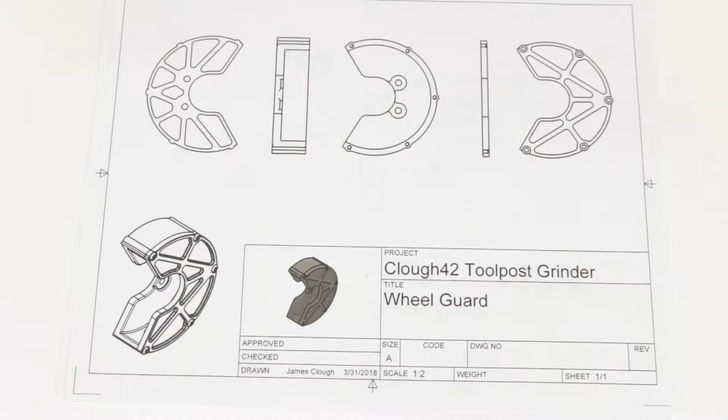I spent a lot of time trying to figure out exactly how I wanted to put together a guard for the Toolpost grinder, and this is what I came up with. You can see here in the isometric drawing, it's two parts. It's a hollow back piece that has a back plate and a wall that goes around the wheel, and then a front plate that screws on with 5 8-32 screws.

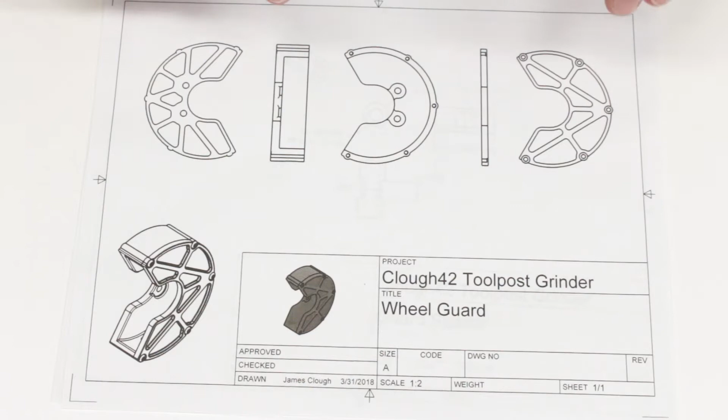Now, I spent some time trying to figure out exactly how to go about fabricating this. This is kind of the design that I had in mind, but this is tough to make. I could make a couple of plates on the milling machine and web them out nicely like this if I wanted to, or just leave them as flat plates, and then make a ring that screws in from both sides, or maybe is welded in. You could do this with a piece of tubing or a heavy ring roller, but it's a lot of work and it's kind of hard to hang on to. There's a lot of really awkward setups.

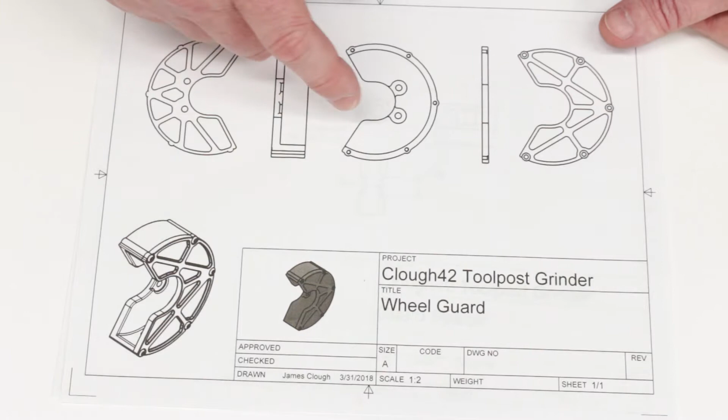And I don't have a welder, so if I wanted to mill this out of a solid piece of aluminum, we're talking about maybe a 6-inch round, 5.5-inch round, 1.5 inches thick, and almost all of that ends up being converted to chips. So that's going to take a long time, it's going to be expensive, and it's not going to be very efficient. Somebody in one of my videos suggested 3D printing the guard.

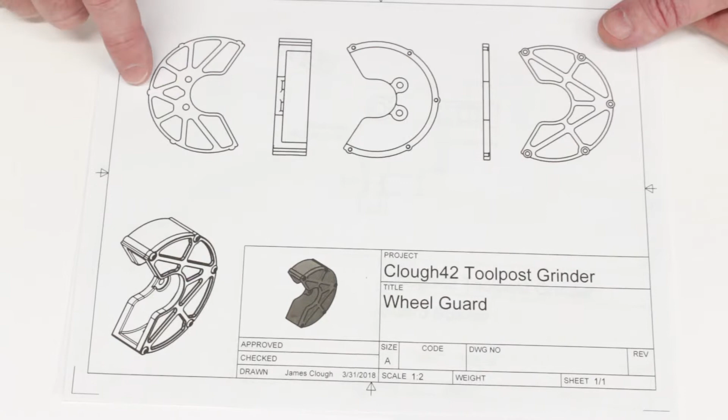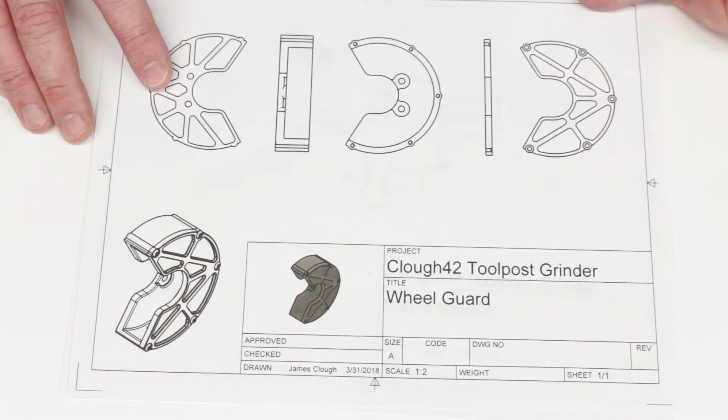Now that's something that I just dismissed up front because I was concerned about the strength. And the primary issue is the layer adhesion. Certainly PLA would be right out. That material is way too brittle. ABS or maybe PETG might be okay. They do have the tensile strength if they were injection molded to make something plausible, but the real issue is the layer bonding.

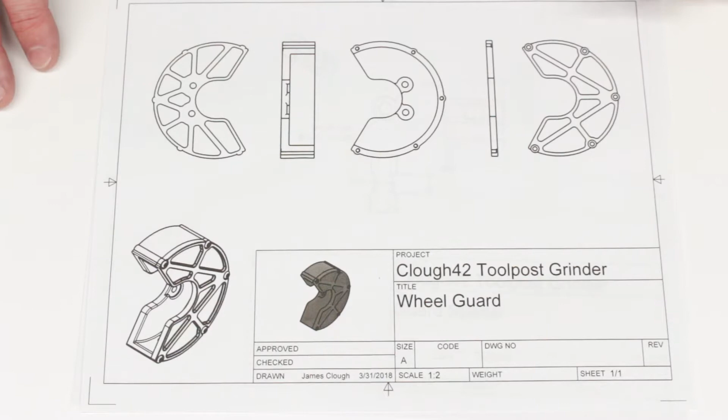So the layer adhesion between the layers: this would be printed flat, and so it would be built up in this direction, layer by layer, and the adhesion between those layers is always a weak point. So I was just too afraid that if I did have an accident and had a wheel burst, it would delaminate and the guard would fail and wouldn't do its job. But then I realized all 3D printers don't work that way. So I had these parts printed on an HP Jet Fusion 3D printer. Now the way the Jet Fusion, I don't own one, I know a guy.

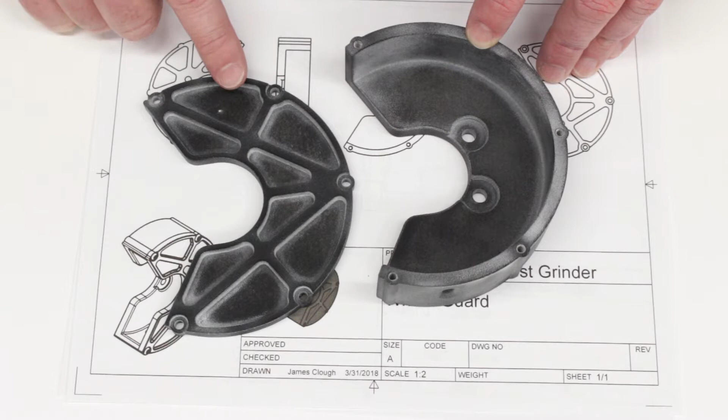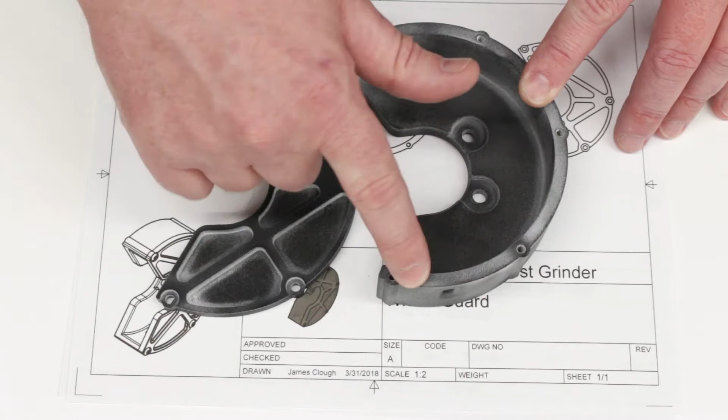The way the Jet Fusion printer works is it builds up layers of powder and it melts those together, somewhat like selective laser sintering, which melts with a laser. But the way this process works is I think they spray down using an inkjet head, comes across the powder and lays down an infrared absorbing material, and then they flash the whole thing with an infrared lamp, which melts the plastic powder together where the infrared absorbing material was placed.

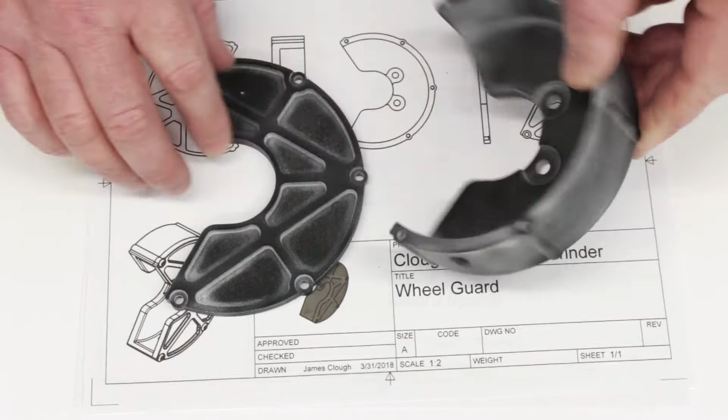So this is nylon, PA12, with a tensile strength around 7,000 PSI. And the great thing about this is that even though this is built up in layers, the strength in the Z direction is almost exactly the same as the strength in the X and Y direction. So you get that 7,000 PSI in every direction.

So just for comparison, a mild steel, like a cheap rolled sheet metal, like you would find in an import grinder guard, is probably going to be around 25 to 30,000 PSI, which is quite a bit higher than this, but the material is also very thin, about 1 millimeter thick.

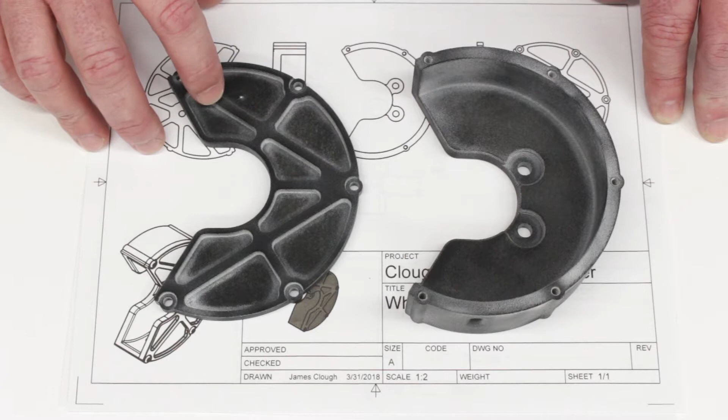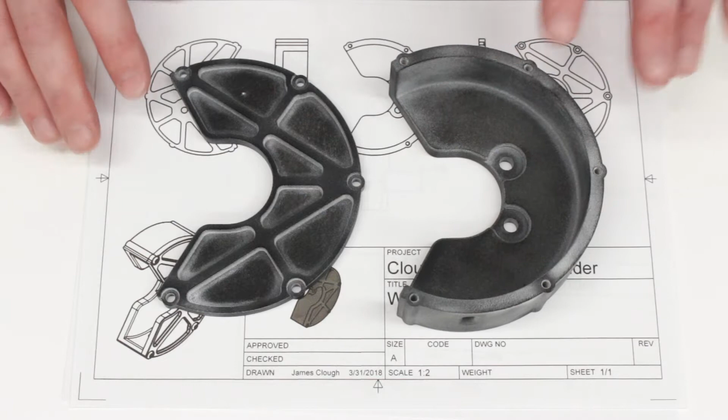And so what I chose to do here is I'm using, again, a 7,000 PSI material, but I made the wall much, much thicker. This is over 6 millimeters thick. It's about 1/4 of an inch. And that gives the added strength. This is solid all the way through. And again, you get that 7,000 PSI in every direction. So I'm satisfied with this.

Certainly if you make a guard for your own grinder, you're going to have to decide what materials you want to use and what you're okay with. But I'm going to proceed with this. I'm happy with this for my personal use.

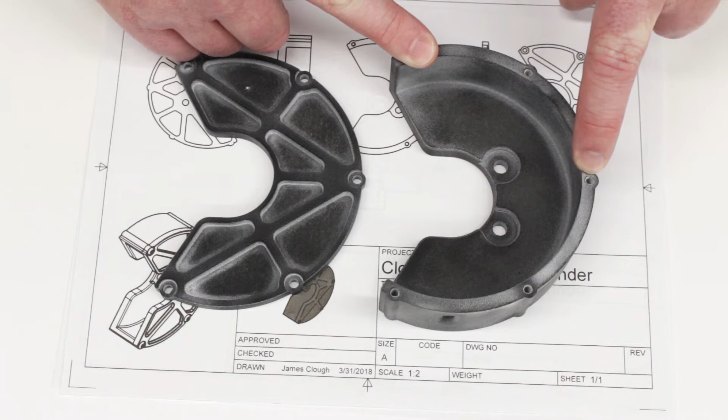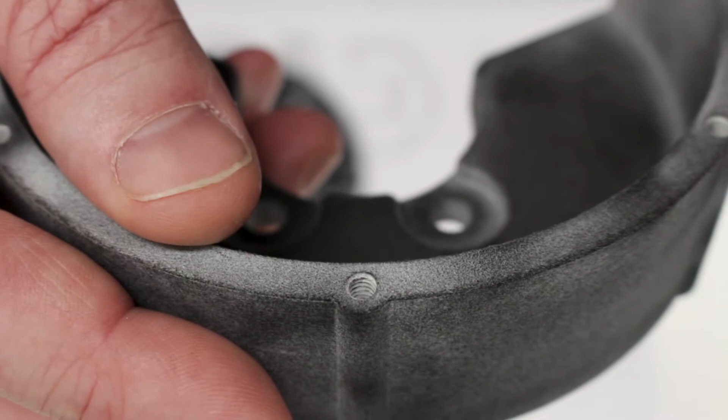Now, in order to put this together, we've got 5 8-32 screws. And I don't know if you can see this, but I actually modeled the 8-32 screw threads right into the holes. And the printer did a really good job. Let me see if I can get you a shot here. The printer did a really good job of printing those. You can see the threads in the holes.

Now, I have done nothing to this. I haven't run a tap through them. Those are just exactly as they came off the printer. They get de-dusted and sandblasted to remove the excess material. And I'm actually pretty impressed. I'm going to try running some 8-32 screws into there and just see how they work.

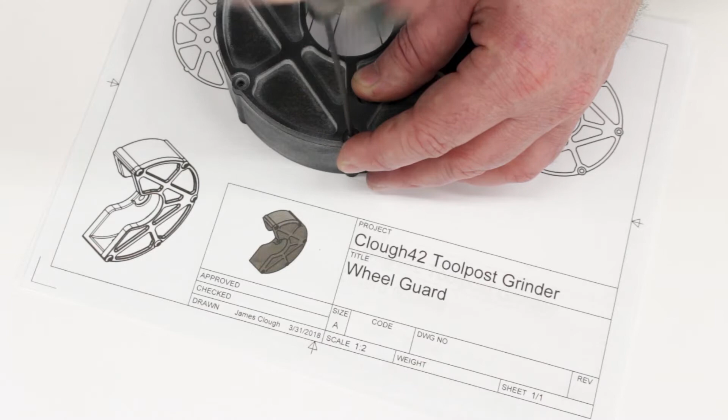Worst case scenario, I can run a tap through to clean them up. But I'm going to give it a shot without first, just to see how it goes. Oh, that goes really easily. And it bottoms nicely. Okay, I think that is going to work. I don't even have to clean those up.

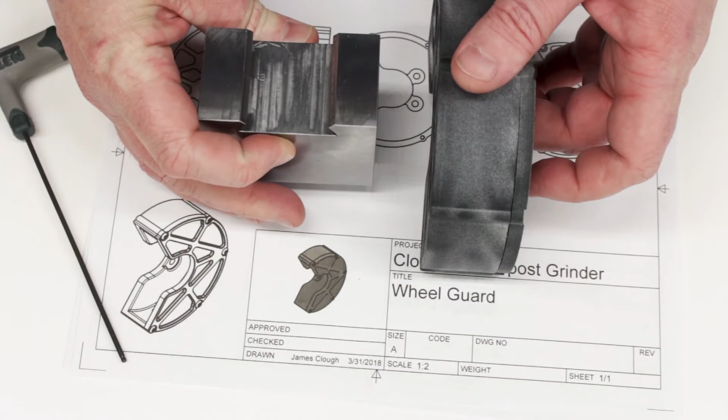Okay, so to connect this to the grinder, there are 2 holes here for 1/4-28 screws, and we'll make a couple of spacers so that that will space off of the tool post clamp. Spacers are just going to be made from a piece of 1/2-inch drill rod. I'm going to make 2 of them, put a couple of flats on it so it's easy to turn, and we'll just drill and thread it all the way through.

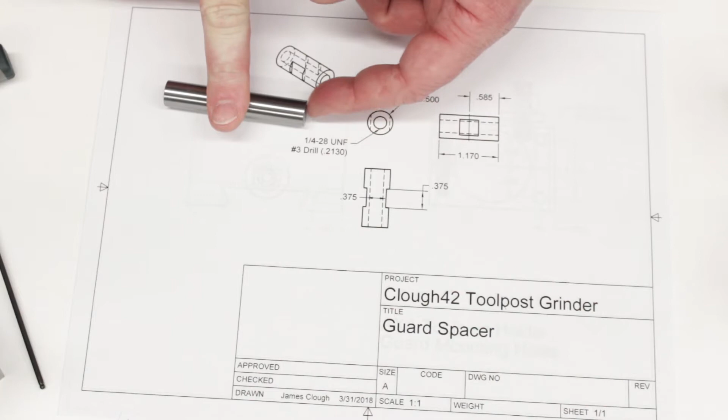So this is enough for 2, so I can use a piece of 1/4-28 screw to mount this in, and then a 1/4-28 screw to mount the guard onto the other end. And then we'll of course also have to take the tool post clamp here and drill and tap a couple of holes in it to actually accept those. So I think we've got everything that we need. I already faced the ends of this to get it square. Let's start by going over to the mill and putting some flats on this.

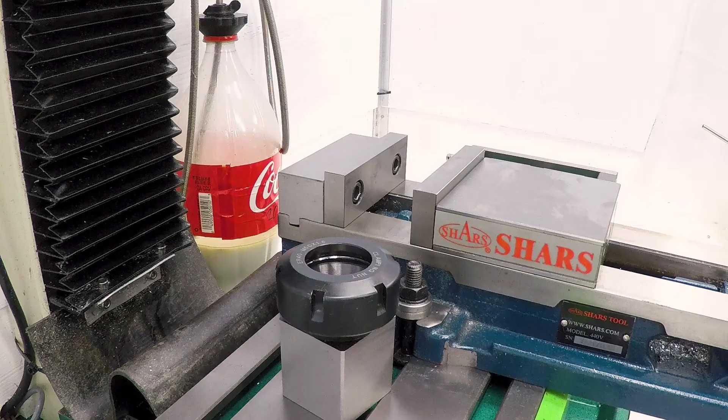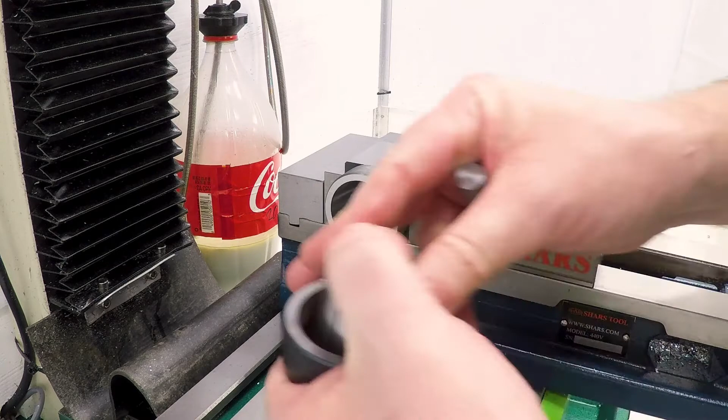Okay, I've got the piece of stock here that we're going to use to make the 2 spacers, and I just need to put some flats in it. And to do that, I'm going to hold it in a collet in this collet block. And this is going to go in here like this. We just snug that down. Grab a 1/2-inch ER40 collet. Make sure this is clean. And put this in. I think that's probably going to be about good. Let me grab a wrench.

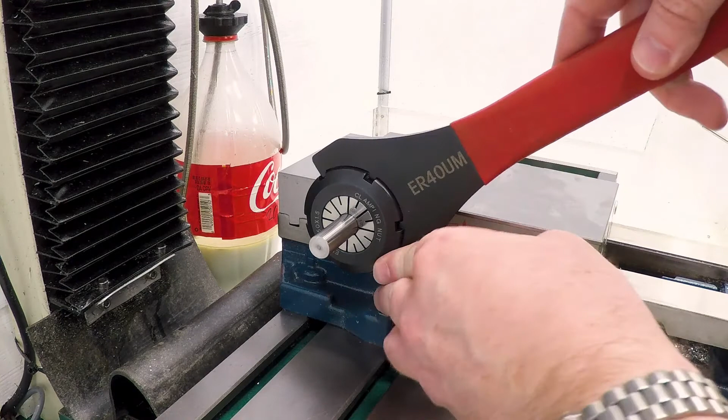Now, I'm going to be flipping this around. I'm going to be doing the top and bottom, and then I'm going to be flipping it and doing the other end as well. So I want a stop. And since I'm going to take this out and put it back in, I can't have the stop on the block. I've got to have the stop on the end here. So let me grab a table stop here. Okay, that should be good enough. Okay, so if I loosen this, I should be able to bring this out and touch that. That'll give me a point where I can reposition it over and over and over again.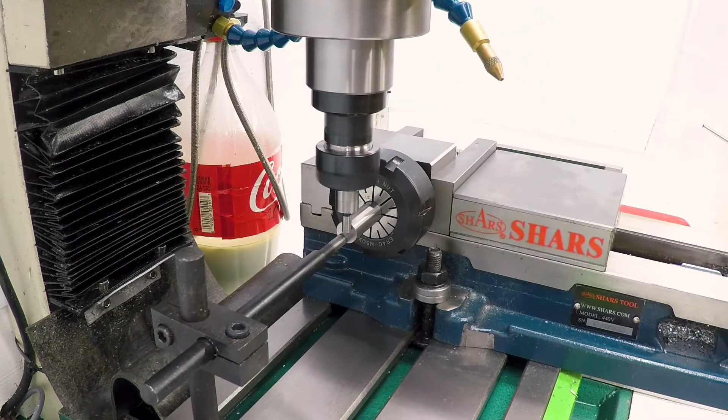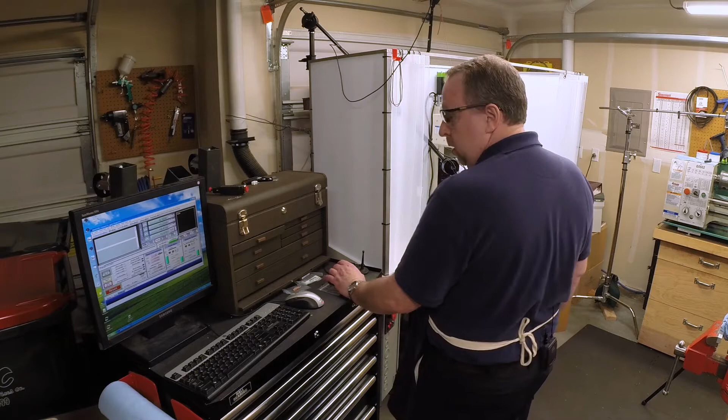Now ultimately, the only thing that matters on this, since I'm going to be going back and forth this way, is I just have to find this end. So I've got an edge finder in here, and let's find that edge. Okay, got my 0 set on the end there, and according to the drawing, I need to go in 585 thousandths. So let's just go in. And that is close enough.

So let me get this tool out of here. Let me grab a 3/8 inch end mill. I think I'm going to run this directly in the R8 collet. So Tormach collet out. Okay, I'm just going to bring this down a touch and figure out where we are.

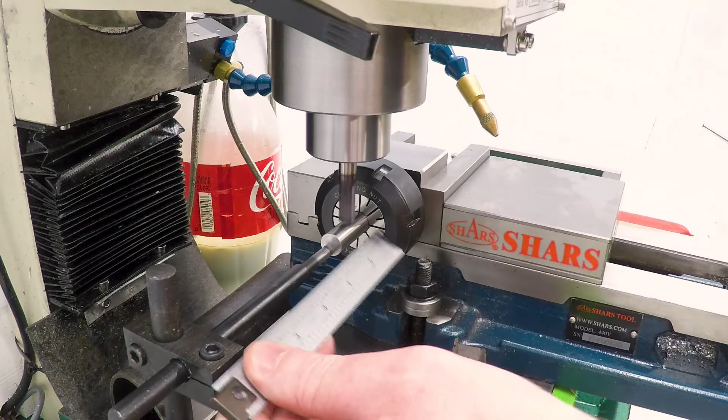Okay, so that's about 0. I'm going to take it down. Let's see, this is a 1/2 inch. I'm going down to 375, so I'm a few thousandths in there. But it's 1/2 inch minus 0.375, which means I need to go down about 125 thousandths and take about 1/8 of an inch off of this. Total, divide that by 2 means 62 thousandths. So I'm going to take it down about 30 thousandths first, and then we will get a measurement.

So I'm just going to 0 my Z right here, and I'm going to dial the Z down around 30 thou. Okay, that's close enough. Okay, get a little bit of coolant on here, take a cut. I do need to slow the feed way down. Let's take this down to 2 inches a minute, just because we can. Put the mill back in high gear. And we'll make a cut across.

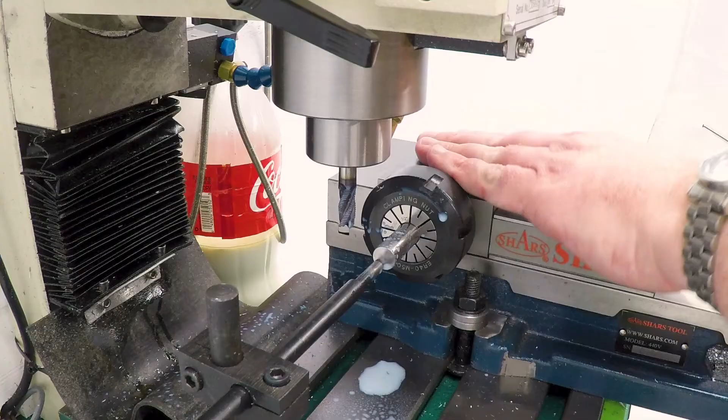Okay, now I'm just going to flip this over. And we're going to make the same cut on the other side. Close quarters in here. Okay, now we just have to measure and see what we actually got. I'm going to go ahead and pull this out because that makes it easier.

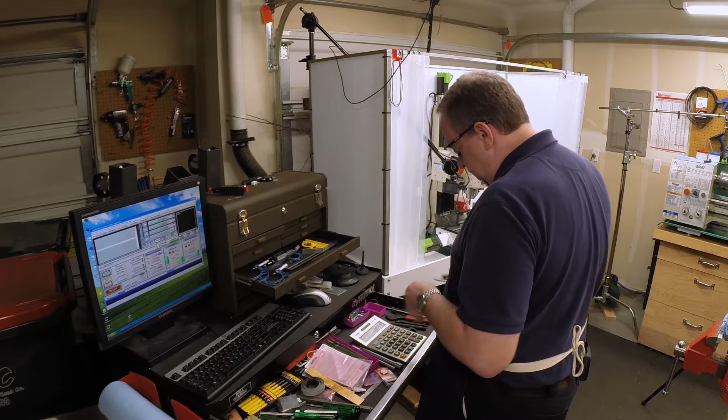Actual is 437, 438. So I'm at 438 minus 375 divided by 2 means I need to take another 31.5 thousandths. I'm going to take 32. I want this slightly undersized so it'll fit the wrench easily, so I think I'm going to take 33 more, which will bring me down to 63.

Okay. I have a 3/8 inch wrench here. Oh yeah, and that fits just fine. That is going to work great. So now I just need to flip it around and do the other end. Okay, and looks like my 3/8 inch wrench fits on that side as well. So that's all I need to do. I just need to get this out of here, clean up the burrs with a file, and then we'll cut this in half.

Okay, next thing we need to do is drill and tap 2 1/4-28 holes here and 2 on the other side. And since I'm going to be flipping this over, I want to make the setup simple, so I've got my stop clamped onto the back vise jaw there. That way I can just put the part in like this and clamp it down, and then when I'm ready to do the other side, I can just flip it over. I don't have to indicate anything in again. Okay, first thing I need to do is get a 0 on this side and find the center so that I can offset for the 2 parts, and I'll use an edge finder for that.

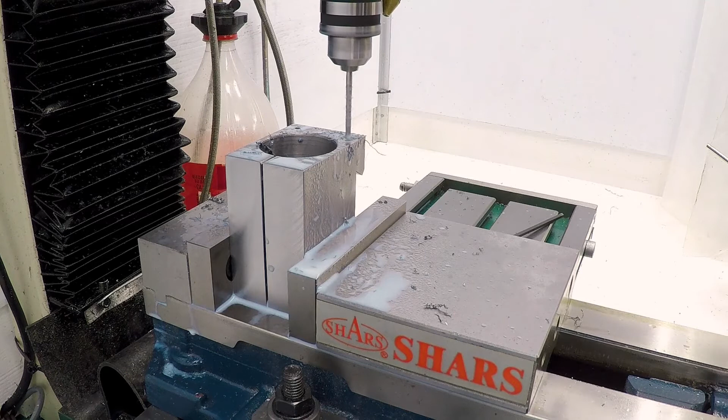It's 100, 200, 300, 400, 550, 560, 575. Okay, now this is a number 3 drill, which is tap size for a ¼-28.

Here's my ¼-28 tap. And we'll just tap these holes. I'm doing this by hand with a tap follower. Because this is a spiral flute tap and it's pulling things up out of the hole, I don't need to worry about packing chips into the bottom. And speaking of the bottom, there it is.

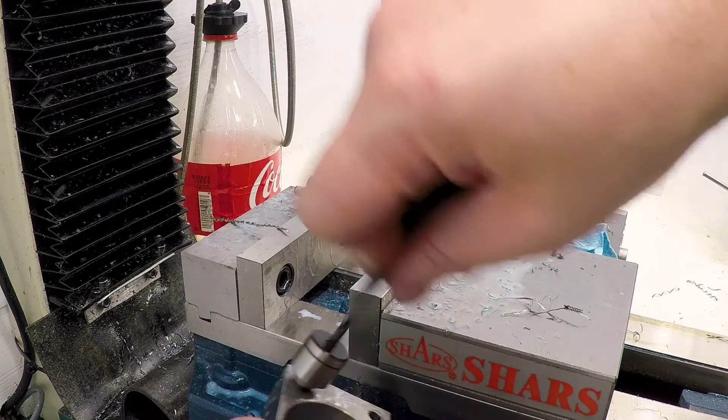It's kind of hard to do reaching around the camera like this. I love the spiral flute taps. Okay. Okay, let me deburr the top of the threads just a bit. And there we go. Good to go.

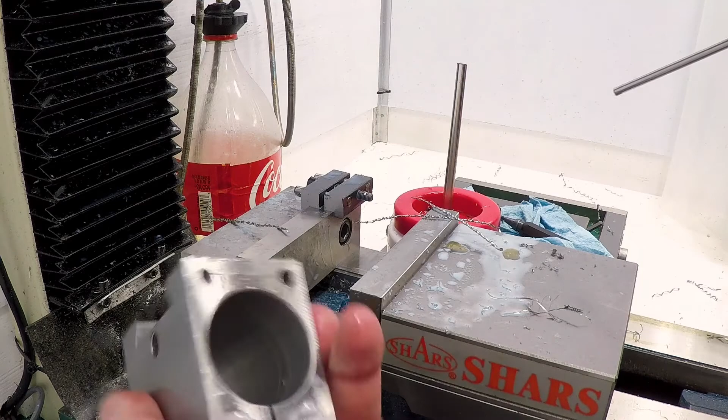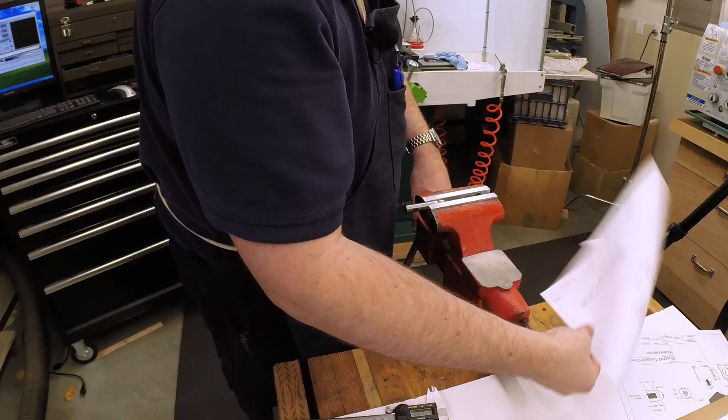Okay, we've got a flat in each end of this piece, so we just need to cut this in half because this is going to be two different spacers. I'm going to go ahead and stick it in here. Let's look at the drawing. The overall length of the thing is 1170, which is inside the vise jaws and is about right there. So I've got plenty of room here to cut this.

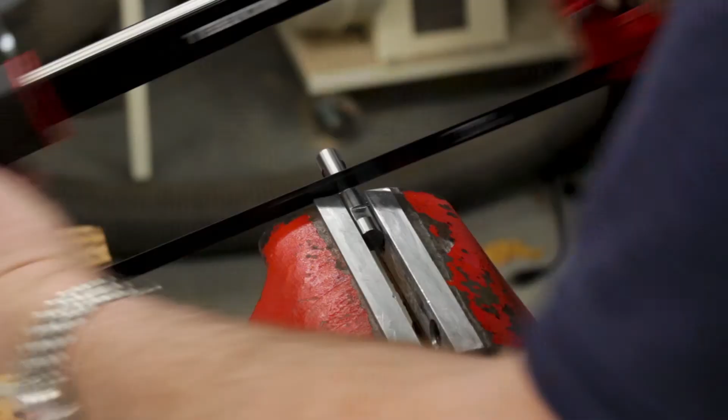And I'm, again, just going to do this with a hacksaw. I could try to do this on the bandsaw, but holding onto a piece this small is really tough. So the hacksaw will get the job done. This is tool steel, so it's a little bit tough, and so it's cutting slowly and bouncing out of the groove.

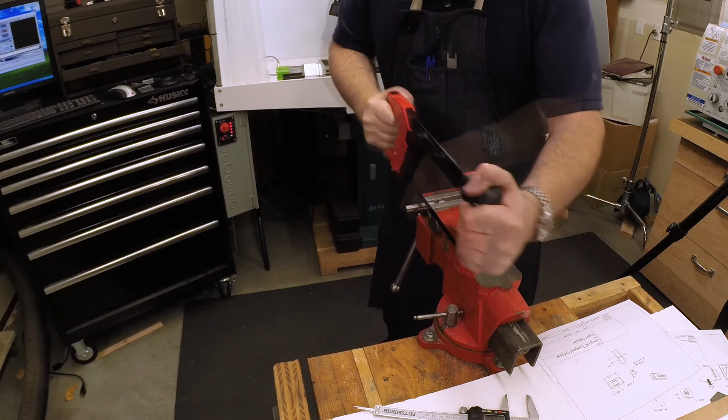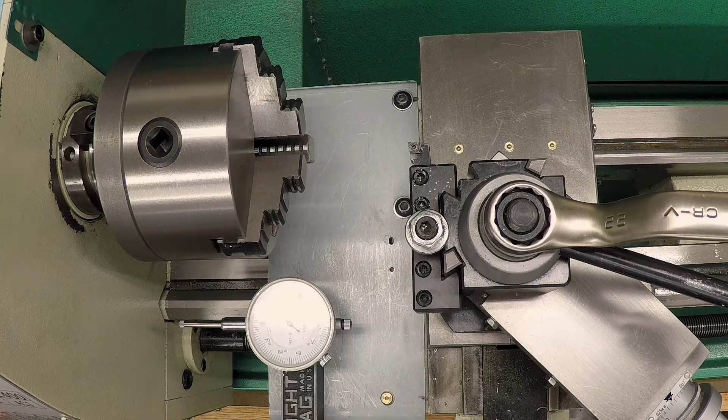There we go. Now I just need to take these two pieces over to the lathe and face them to length and put some threads in them. Okay, we have both of these cut off now, and one end is already faced and clean. We've got the flats in there. Now we just need to face them to length.

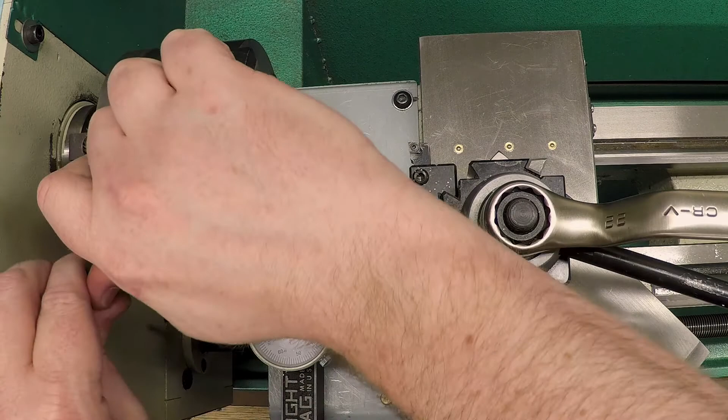Now to do that, I'm going to stick them quite a ways out of the chuck. And the reason I'm going to do this is so that I can get calipers behind it to measure the length. Make sure it's tight, because it is sticking out quite a bit for its diameter. That looks pretty good. Let's face it off.

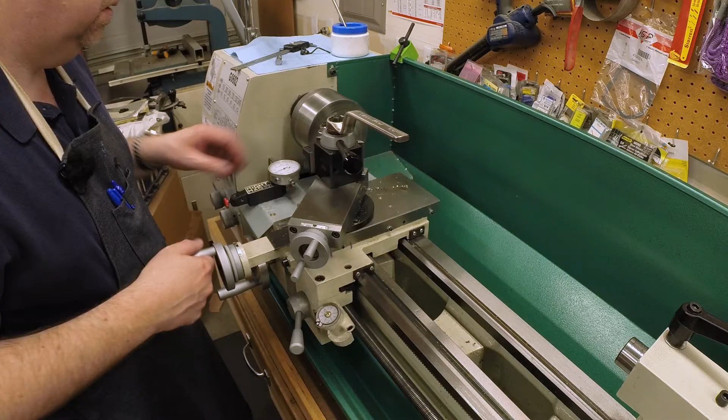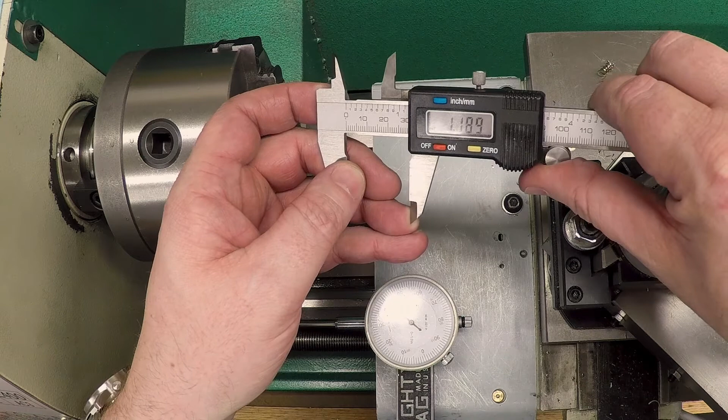Okay, so the length of this needs to be 1170. So I'm going to bring this out to 1170. 1170, zero it. Now I can measure this. Turn this over so you can see it. And it looks like we need to take 144 thousandths off.

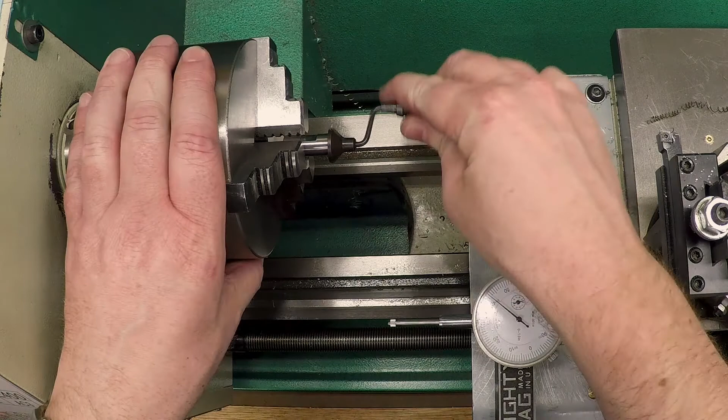I've got my dial indicator. There's 0. 15. 1. There, we're within 1 thou, which is good enough. Let me just take the burr off the edge. There we go. We'll come back and drill this later. Let me face the other one to length.

Okay, next thing we do is just poke a hole through this and thread it. Then we grab a drill chuck. Okay, first thing I'm going to do is just spot the end. I'm just going to use a center drill for that. Now I'm going to use a small drill and just pilot this through.

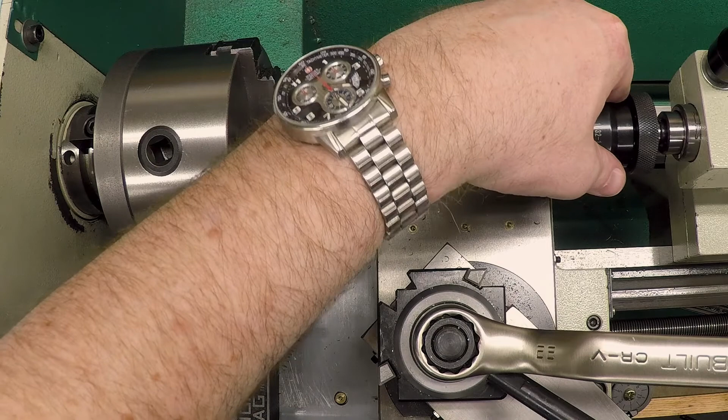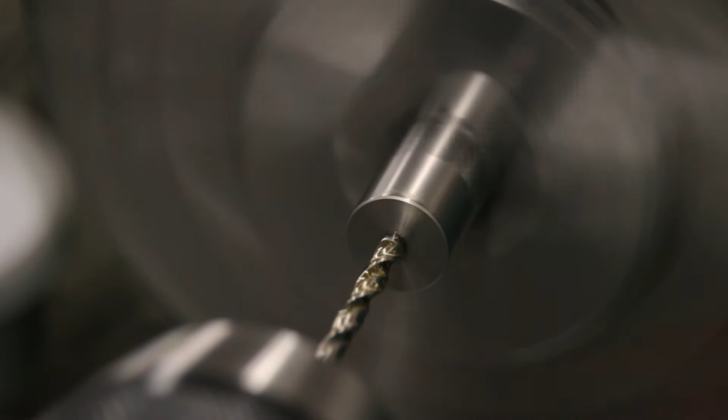First, I'm going to slow this down quite a bit. Letting the tip find its own center here before I start pushing. Now I'm not going to try to go all the way through this. I'm going to go about halfway from each side. And there's about 3/4. 3/4 is far enough.

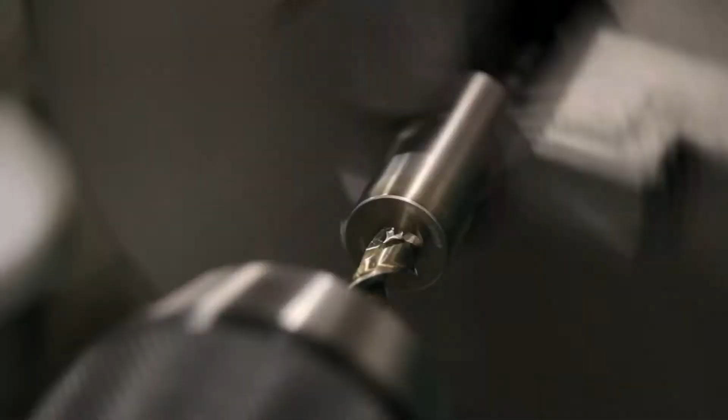Now the number 3, which is the tap drill. Tool steel is actually getting pretty hot. I'm just going to slow it down even further. Now I'm going to flip the part around and do the same thing from the other end. In fact, I'll go ahead and do both parts from both ends.

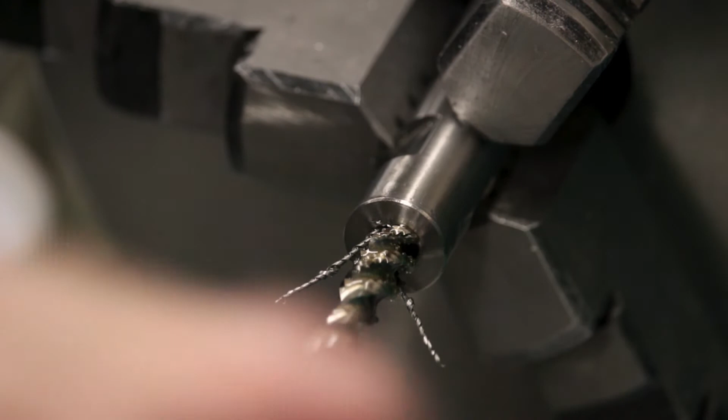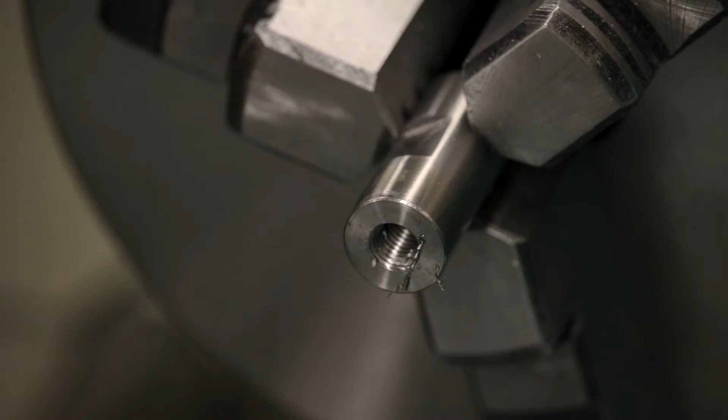Okay, I got a 1/4 tap here, and we're just going to go ahead and push it through. Now I'm going to set this up and run it under power, I think. Am I? You know what, I'm not. I'm just going to hand tap this. This is pretty tough stuff. Great, now let's flip it around, do the other side. You don't have to watch this, it's going to look exactly the same.

Well, it's a man in a white van trying to sell ice cream to kids by playing music. This, you know, that seemed okay when I was a kid, but boy, today, that seems kind of questionable.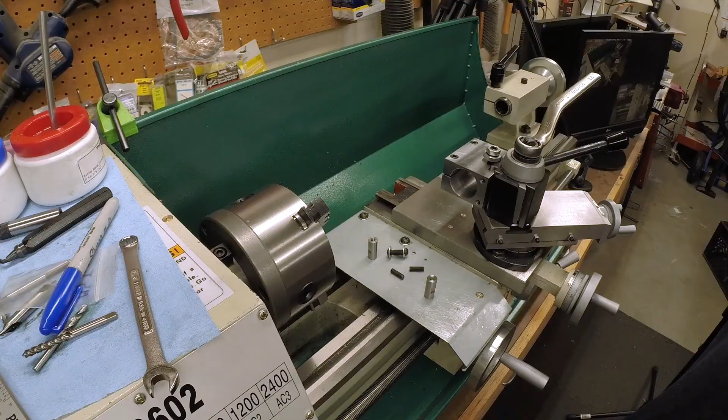Okay, that's the last of the tapped holes. I think we're about ready to put it together. Okay, let's put this whole thing together. So I've got the tool post block in here. I don't have the grinder in it, just so it'd be easier to see what's going on. So I've got these spacers with the flats. We put a piece of 1/4-28 screw in there.

Actually, you know what? I'm going to put them in here first. Let those kind of bottom in the hole. Then we'll put on a spacer. Snug that down with a 3/8 wrench. Put on the other spacer. Snug that down with a wrench. Oh, those are really solid.

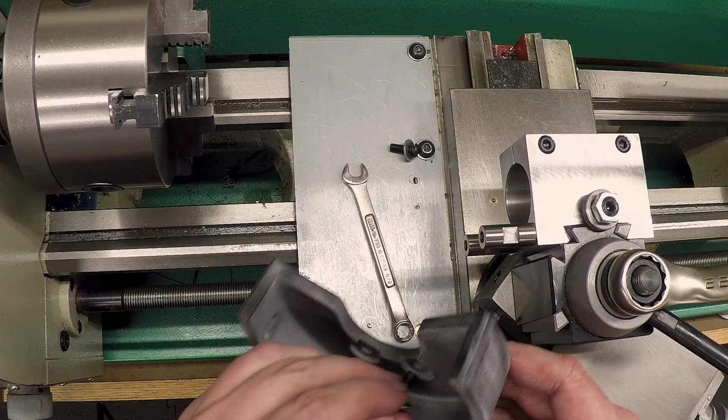Very happy with that. Okay, and then this is the body, and it goes on with 1/4-28 button head screws. Hey, the hole's lined up. That's awesome. Let's see, what size are these? Oh, nope. Okay, that's the body of the grinding wheel guard. Oh, that's nice and solid.

Oh, by the way, there's a drain hole down here in the bottom. I don't know if that was evident earlier. That's so that if I'm ever grinding with coolant, it won't pool up in here. It can just dribble out. Okay, let's put in the grinder itself. I think we've got the depth right, but we can adjust the wheel later if we have to.

Speaking of the wheel, here it is. And I'm going to put the drawbar in from the other side. I think this drawbar is a little longer than it needs to be. I may trim that off at some point. Okay. It's nice. I got about a 1/4 inch gap between the 4-inch wheel and the inside. What are we doing for center? Feels pretty good.

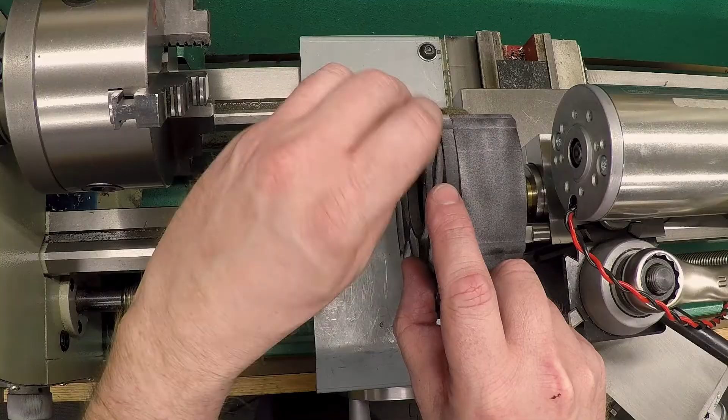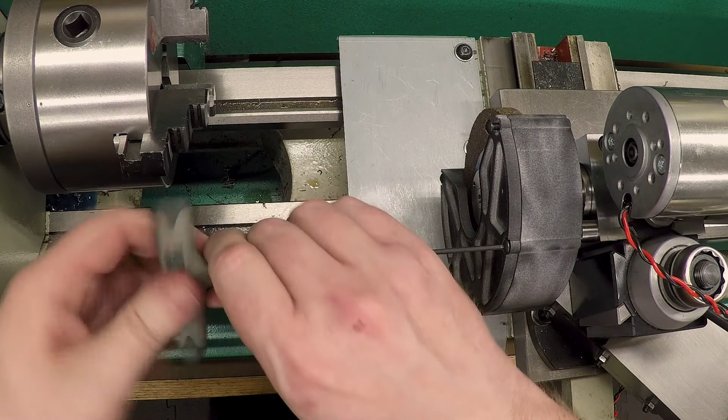Okay, now let's put the screws in the cover. For 4 of these screws, this is the first time they've ever gone in, and I'm pretty happy with it. It feels pretty good. Those printed threads modeled into the part worked out great. Okay. That looks nice. Nice and rigid. I'm very happy with that. That's more rigid than the guards on my bench grinder.

Well, that is the wheel guard for the toolpost grinder complete. I could not be happier with how that turned out. It's nice and rigid, and I'm very pleased. We are just about ready to run this thing in anger for the first time. The only thing we still need is a single point diamond dresser so that we can dress this wheel square and concentric before we start grinding, and we will work on that next time.